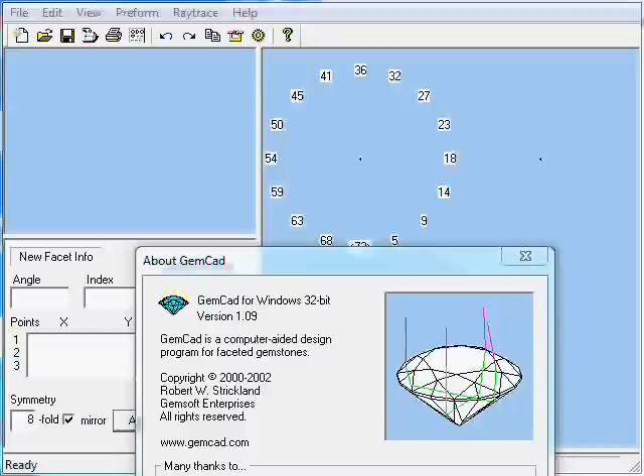This is a tutorial on how to use GEMCAD for Windows to design a 9-main round brilliant, and today we're going to do it using a 96 index gear.

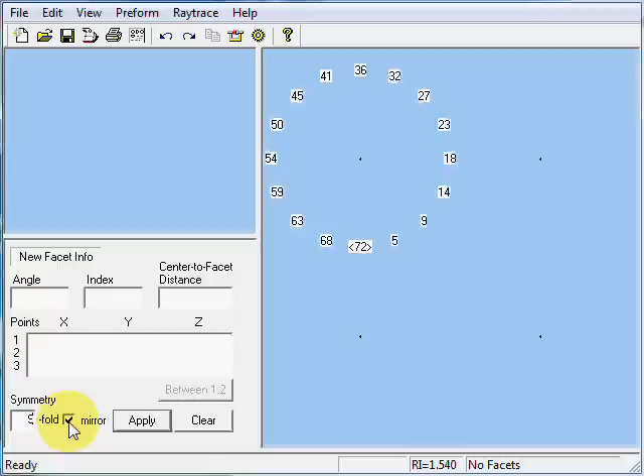Let's get started and set our symmetry to 9-fold mirror image symmetry. I'm going to highlight what's in the symmetry box, make sure the mirror checkbox is checked, and click apply. Then I'm going to select the 96 index gear by moving my cursor to the ID position indicated by the angle brackets and clicking. I'll select 96 from the drop down box and click OK.

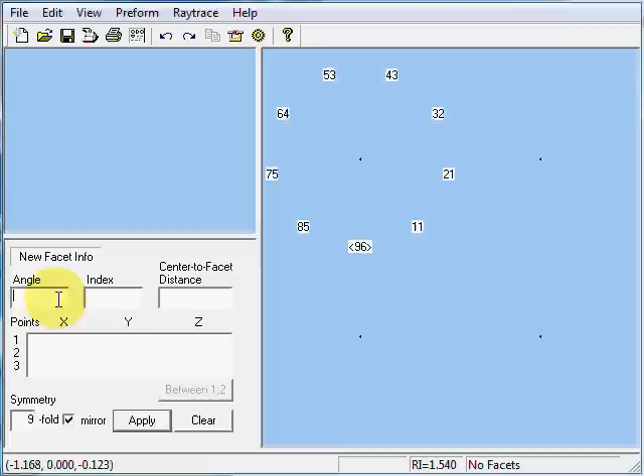I'm going to jump right in and cut the girdle facets first. So give it an angle of 90 and an index of 3, and the index of 3 came from the previous lesson. If you don't understand where I got the 3, look at the 72 index gear lesson. And then cut facet. Okay, so we've cut our girdle facets.

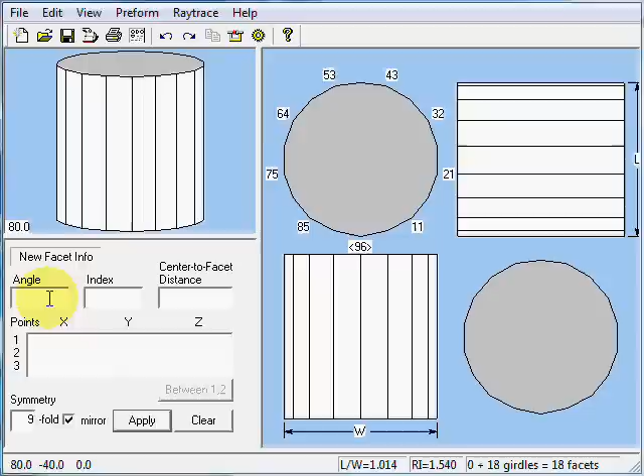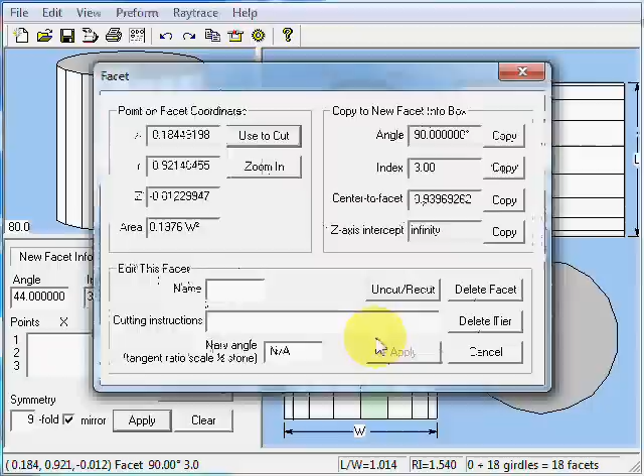Now let's cut our pavilion break facets. Let's pick an angle of 44, and an index again of 3. I need to use the same index as the girdle facets. Now I need to give it a point somewhere on the facet of index position 3. You can see if I click on this facet, its index is 3, so I'm on the right facet. Click in the facet, then click use to cut, and now we're ready to cut the facet.

And we've cut our pavilion breaks now. Now we're ready for the pavilion mains. So I'm going to meet this point, and meet this point on the edge here, just establishing the edge of the girdle of the main facet, and its index is 96 or 0, either one, whichever you prefer. Okay, so now we've finished our pavilion and we're ready to transfer.

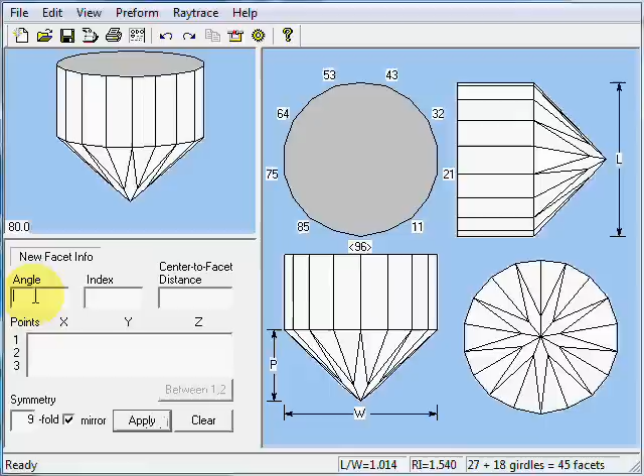We're going to click the little transfer fixture icon here, and we need to cut our crown break facets. Pick an angle, 38 degrees. I'm going to use the control key trick now to leave some girdle thickness. We'll give it an index of 3 again, and cut the facet.

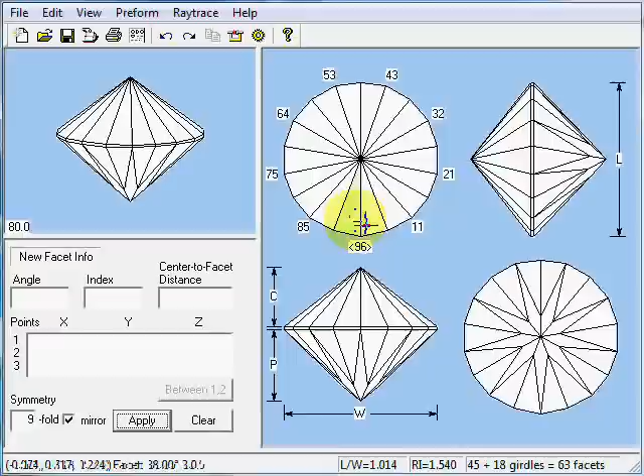Now we've cut our crown break facets and we're ready to cut our crown mains. Just like on the bottom, I'm going to do this by eye. So click this meet point here, and that looks about big enough for mains, with an index of 96 or 0. And we're going to cut those.

So far this is really no different at all than cutting an 8-sided brilliant or the 9-sided brilliant on a 72 index gear, other than the index numbers.

So next I'm going to cut the star facet. We're going to meet this point, and unfortunately I need to cut this halfway between 96 and 11, so let's try 5. And I want to meet this point here in the middle of the facet. Let's see what we get. Uh-oh, we got some facets that missed the stone, and we can also see that we've got some extra facets.

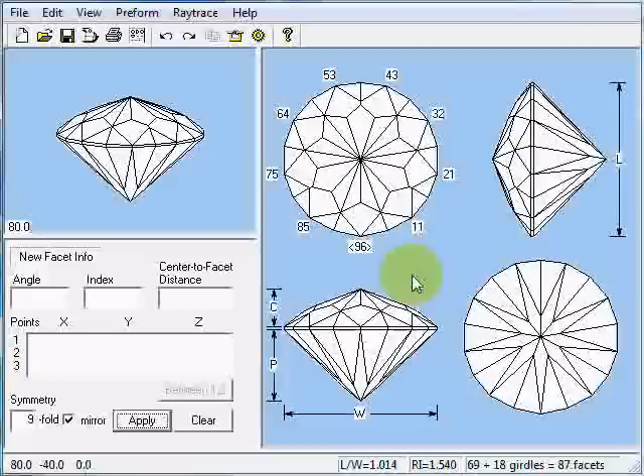Let's zoom in on the top view. That didn't go so well. The solution to the problem of the extra facets is, instead of starting at index 5, we'll start up here at index 48. So use to cut, index of 48, and that looks about the right size.

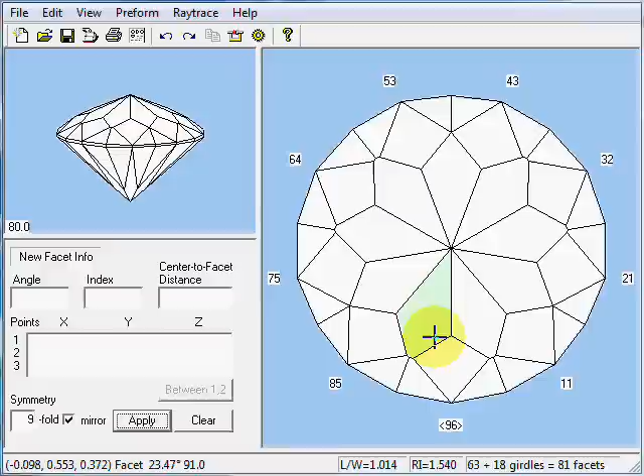Okay, good news, bad news. The good news is we've only got 9 star facets. The bad news is the meet points are lousy. We're going to fix those later though. So let's give it a meet point and then cut the table, angle of 0.

Okay, now I'm going to repair all of these meet points, and what I'm going to do is treat the stone just as if it were a pear shape or a shield, and use 1-fold mirror image symmetry. So I'm going to use GEMCAD's Uncut Recut feature.

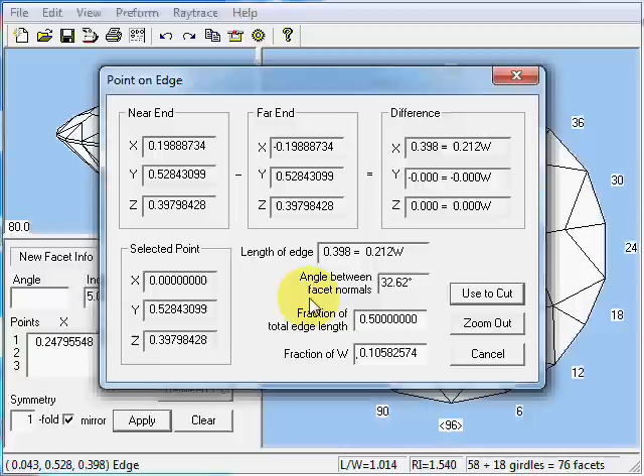I'm going to click in this facet, do Uncut Recut, and click here, and click at a point halfway. I'm going to use GEMCAD's fraction of edge length feature to bisect that line. So I'm going to enter 0.5, and that'll give me a point halfway between this point and that point. And we'll recut.

So let's go 26. Meet this point and meet that point, and we'll cut. Next we need one between these two facets.

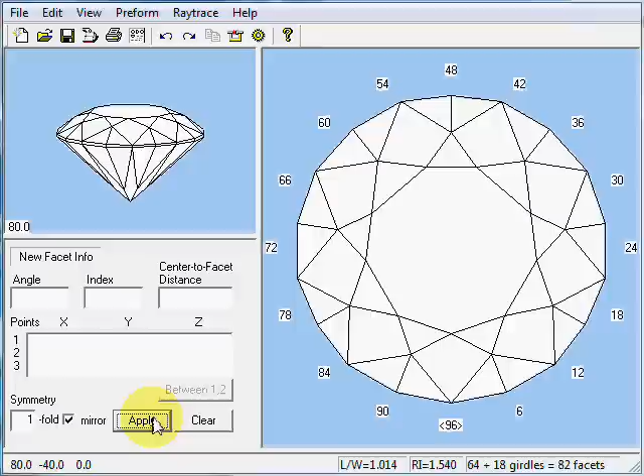Okay, that completes our round brilliant. If I had it to do over again, I probably would have changed the index on this facet, but that's basically how you would use GEMCAD to design a 9-sided round brilliant using a 96 index gear.